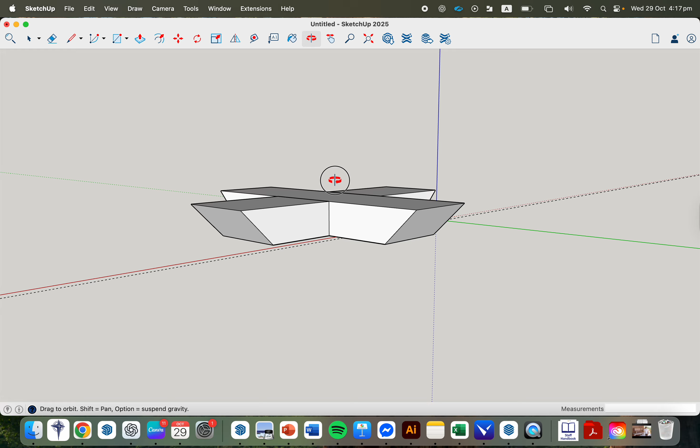We're going to be drawing the top part of the pedestal table, similar to the bottom part, but different, in that it's a cross-halving joint, but just slightly shallower, just so we can fit the tabletop on top. So basically, you can see this is what I've drawn already.

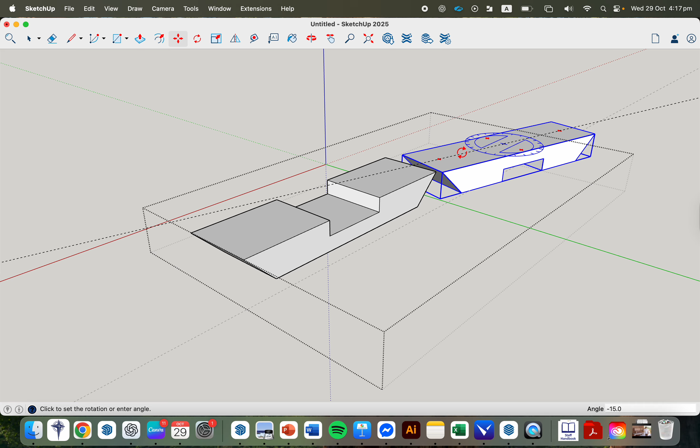We need to draw both pieces, which are very similar. When I rotate these around and put them next to each other to show you, they're similar in that we have 45 degrees on each edge. So basically the shape, if you take this part and this part out, we have the same shape. What we're going to do is draw this shape first, and then put in the details of this cutout so that this bit fits on top of that bit.

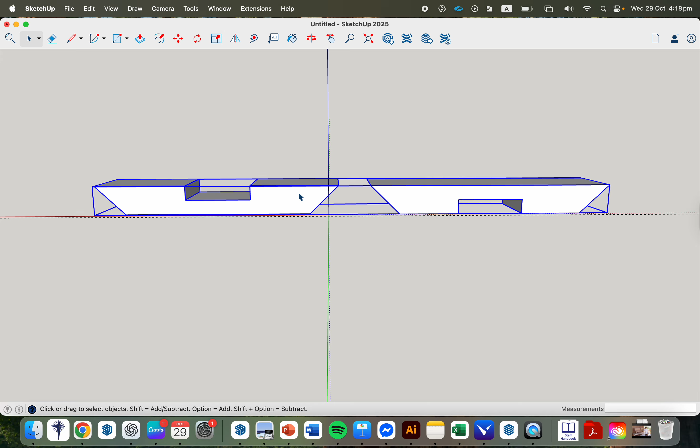Right, so all my hard work, I'm going to delete there. What we're going to do is open up a new window. So we're going to go File, New from Template. If you've already started your drawing, obviously you just continue with your drawing. You should always be selecting woodworking millimeters.

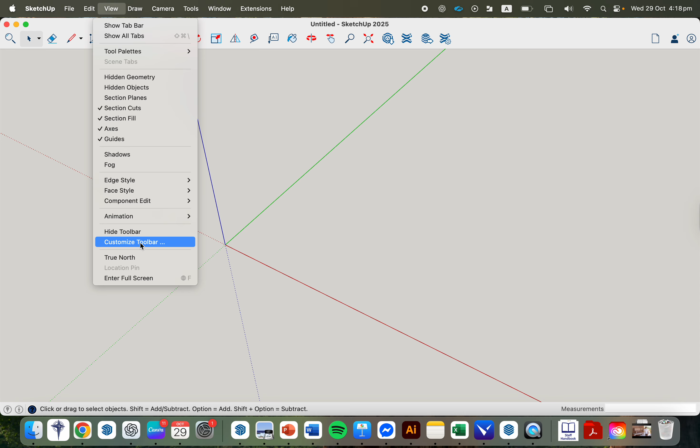Now there is something I want you to add to the toolbar at the top here. So if you go View, Tool Palettes, Customize Toolbar, click on that. And these are all these extra things you can put into the toolbar at the top here.

One of the things I find handy is this standard views. I'll show you in a sec, but you're just going to click and drag that into the top left hand corner here like that. Then you can press Done. So you can see, just while we're here, all these extra things you can be adding to your toolbar. If you find along the way that you need to add certain things, you can do that.

All right, press Done. Now the reason for that is because I want to draw the front shape. I want to be able to draw this top brace detail, this bottom one here. So I want to be able to draw that shape. When I flick across to SketchUp here, it's hard to orbit around, see, it's not great.

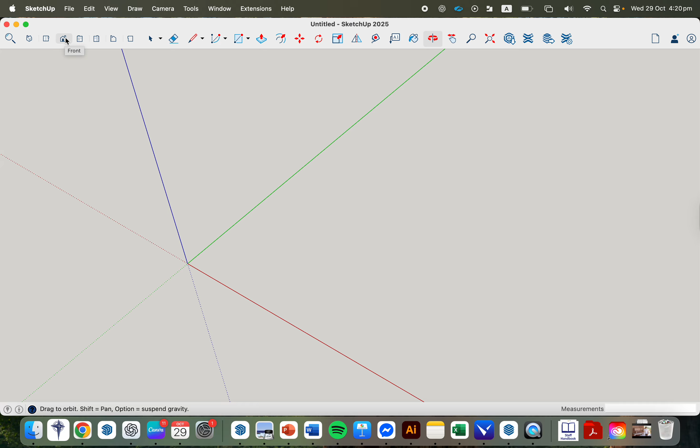So what we're going to actually do, when you use these panels up here, you can flick to a certain view. For example, ISO is isometric view, like a 3D view. If I want to flick to the top, I can do that, so that's a bird's eye view. What we want to actually do is go to the front. Now it doesn't change much there because I haven't drawn anything, so it's hard to tell.

But believe me, I want to be drawing from the front. So this is like the vertical plane from the front view, and that means I'm going to be drawing this shape from the front view.

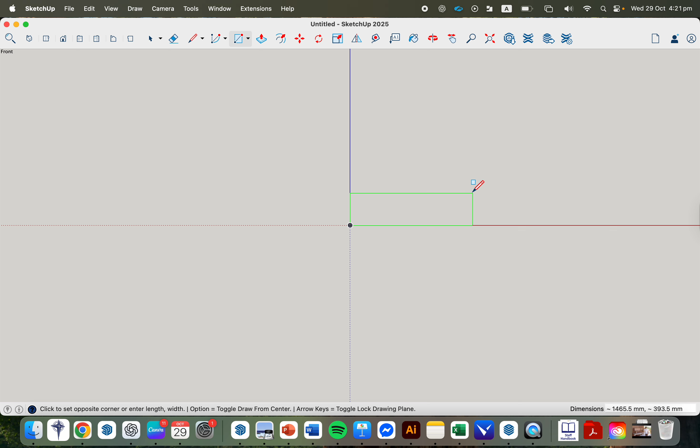Okay, so flicking across from this information, I'm going to draw something that's 150 millimeters long and 18 mil high. So I'm going to draw a rectangle, pick up the rectangle tool, come to the origin, click once, draw a random rectangle similar to the size I want, and then just type in 150, 18. Enter. And you can see that's a pretty small rectangle.

The trick here is you can press this zoom extents magnifying glass. If you do that, if you ever lose your project, sometimes you zoom out so far you go, where did I put my project? You can do the zoom extents and it brings whatever you've drawn into full screen. So it's cool. I'm just going to get my mouse pointer and zoom out a little bit there. So that's the rectangle we want to work with, the basis for this.

Now we're just going to draw these details in basically. So here we have a 45 degree angle coming down both sides from the top. So we're going to put that detail in first. So the tool that we don't have is the protractor, the protractor being what we use to measure angles in maths, hopefully you're aware of that.

There's two ways of doing it. You can do what I did before by going View, Customize Toolbar, and here you can see the protractor. So because we're going to be using that, you can drag the protractor up into your toolbar.

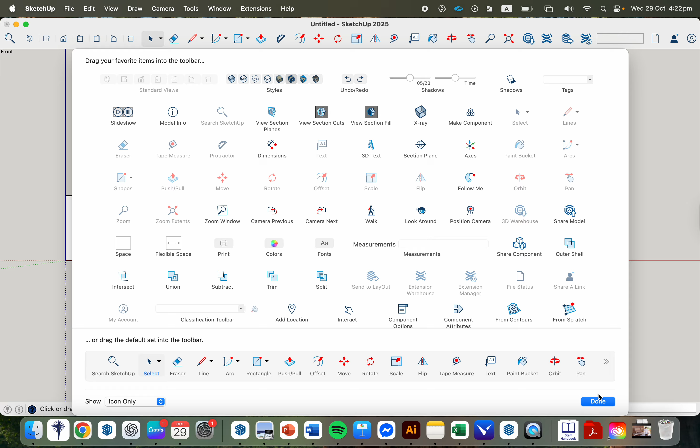Press Done, so it's now there, we've added that. Or if you want to just have all your extra tools available, you can pick on Large Tool Set, and that brings up a big suite of tools that are just a bit more than what you've got as the default set up the top. So either or, I'm going to work with just dragging the protractor up into my toolbar because that is less clunky for me, but whatever you guys prefer. Now, to get a 45-degree angle, we want to bring it down.

I'm going to do the left-hand side first. You're going to click on the very top - that's kind of like the pivot point. So you're going to click here, and then our second click will be at the bottom. That's telling SketchUp that's going to be my baseline.

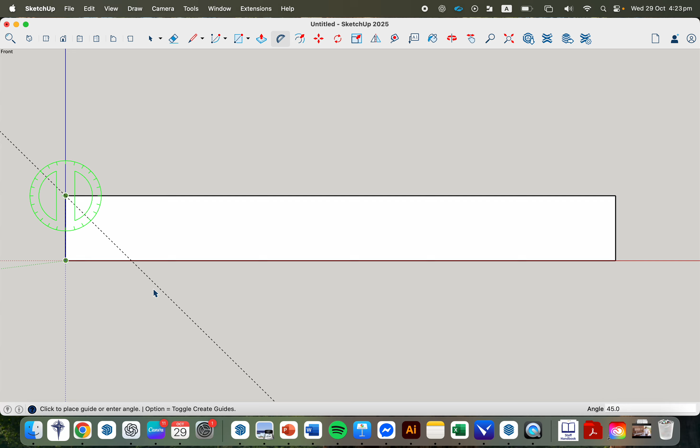Then I'm going to drag across until I get to 45. As I continue to drag, you can see down here it's snapped to that exact number, which is good. But if not, remember you can just click anywhere and type in 45.

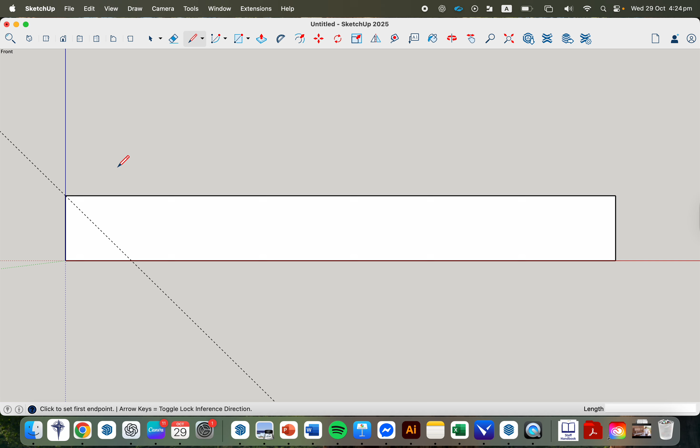Now that gives you a guideline, which is good at 45 degrees, but that's not an actual line, that's just like a guideline. So what you need to do now is pick up the pencil tool and actually draw that line in. We can then pick up the eraser tool, highlight over our guideline, and get rid of the guideline. So I'm going to repeat that process over on the right hand side.

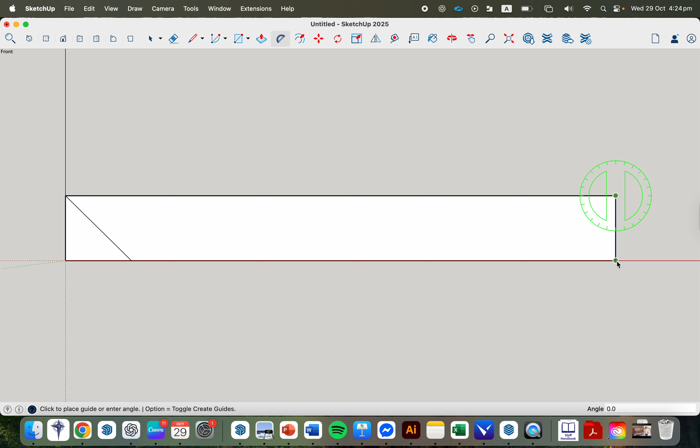So I'm going to pick up the protractor, start at the top, click once, and then the bottom, click again. I'm going to bring that up back to 45. Again, you can pick anywhere really and just type in 45.

Guidelines at 45. Pick up the pencil tool and draw - click at one end, click down to the other. It will snap to that grid. Draw the line in and then erase the guideline.

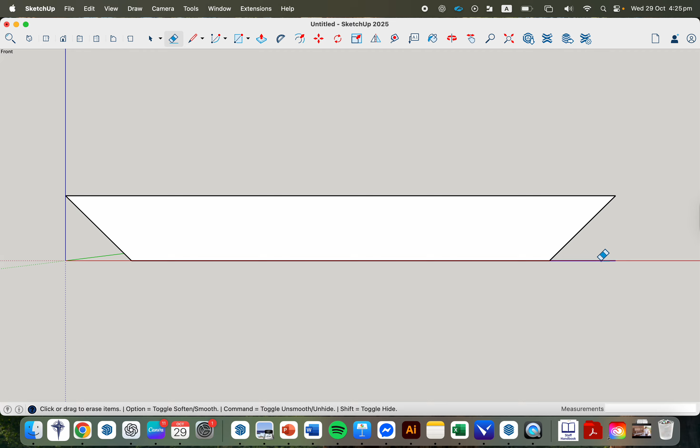Now, because we're working in 2D here, we can essentially erase our lines there that we don't need anymore. Okay, so we're left with our base shape that we need, which is excellent.

All right, now we have to figure out - have a look at this here. This is 40 millimeters in the middle. So we'll worry about this one here first. What we want to be doing is figuring out if this is 40 millimeters in the middle and we have a total of 150 from one end to the other, what are we left with in this gap? So if we go 150, take away 40, we end up with 110.

We have to divide 110 into this side and this side evenly, and that's going to give us 55 each side. So we're going to go from this edge into here - that will be 55 millimeters. So this is part of what we do, is we're going to have to read plans and figure out measurements. Not everything's always black and white here. You're going to have to figure some things out like that. So 55 mil from the end.

So what we're going to do - pick up the tape measure. I'm going to measure from the left-hand side, click once, drag the tape measure across and type 55. That gives us a guide point there. And we're also going to do that - click once on the right-hand side and drag it left 55.

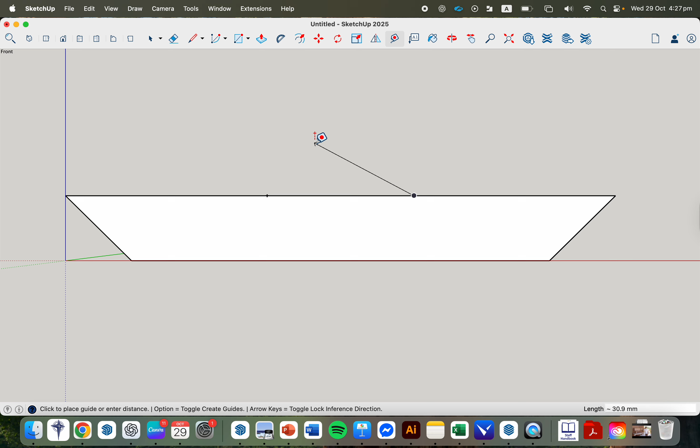Now, you can double check this if you want - we may as well. If we go from that guide point to the next one, you can see down at the bottom right-hand corner that that's 40 mil. That's excellent. So instead of clicking on the end, just press the escape key, ESC. The escape key is used if you just want to deselect, just not be on that selection. So we've done that.

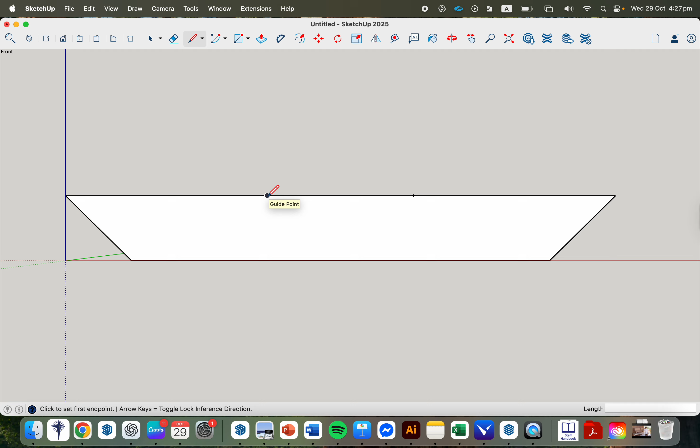So what we're going to do is draw a line down from those two guide points. Pick up your pencil tool. From the top guide point there, click once, draw a line straight down, and we're going to do the same thing from the top here. Click once, draw a line straight down. By default, I always go back to the mouse pointer - click that, and that just means I'm not going to be making any mistakes. Now, that's what we want.

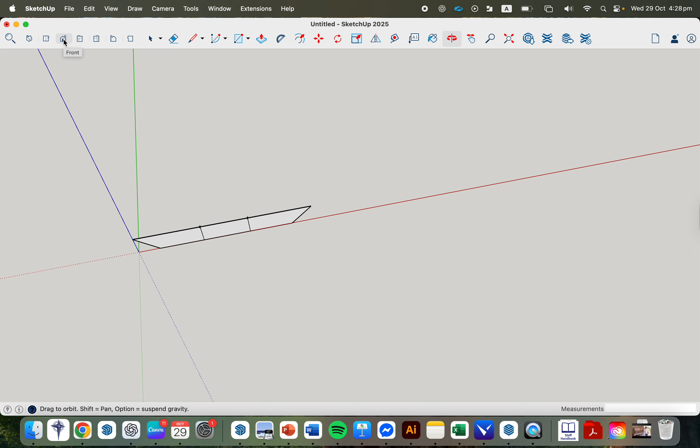Now, at the moment, I haven't used the orbit tool at all. I don't want to do that - I want to stay on this plane. So if you do, by accident, go like this, and you want to get back onto that front plane as if we're drawing in 2D, because that's essential, just click, go back up to the views and press front. Okay, so I want to be keeping that true, so right on that plane.

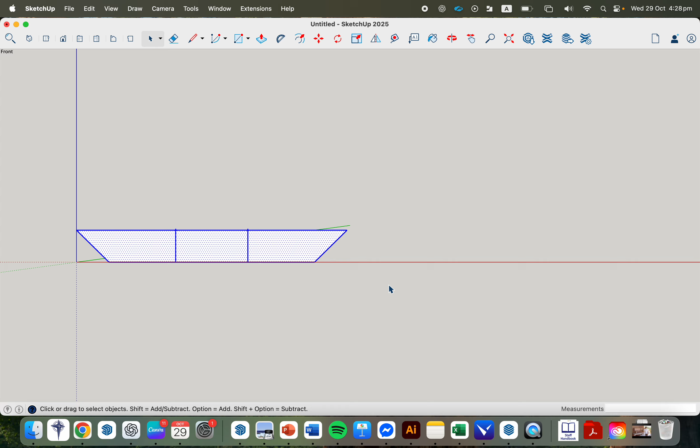Now, to save us having to draw all that information again, we're going to use the good old copy and paste. So you're going to get your mouse pointer, hold it down, select all of that, and we're going to press Command C and then Command V. And that's going to give us a whole other piece in the space of 2 seconds, which saves us a lot of time, which is good.

Okay, so the reason we haven't done any of this yet is because we can use those guidelines to cut out the top. I'll flick over here. One of them we've got to cut out the top, one of them we've got to cut out the bottom.

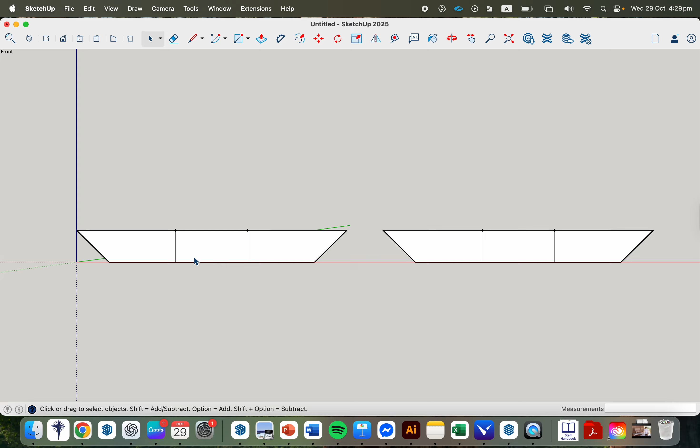So I actually probably could have done this midline, but that's okay, we'll do it here. Pick up the pencil tool, and on your left one to start with, you'll be able to pick up a midpoint. So you click on it, then click to the other side, inside here. As I said, you could have done this first and then copied and pasted that, but that's okay. We're going to do that to both. SketchUp, being intuitive, will pick up the midpoint, so you just click on the midpoint, then to the other side and click again.

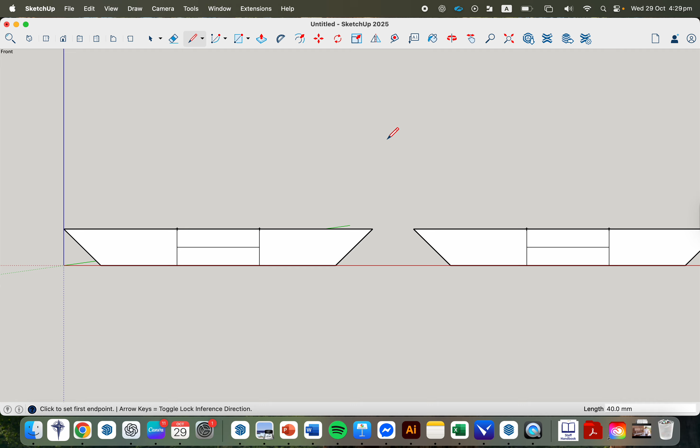For one side, you'll erase the top line. The other side, erase the bottom. And we have 2D versions of what we need, one being this, one being that. Also erase these extra lines that we don't need. Here. Here.

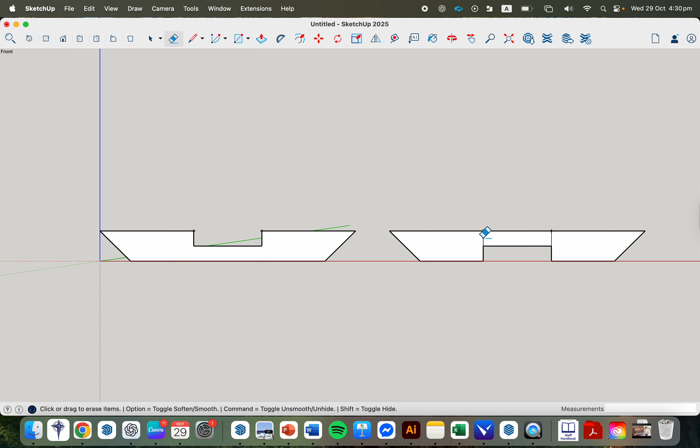Now we've also got those guidelines, guide points. If you simply get the mouse pointer, highlight over each of those guide points, we don't need them anymore, they can go away. You just highlight over the corners and press delete. So essentially that's a good way to do SketchUp in just creating your face at the end, or the edge of that piece.

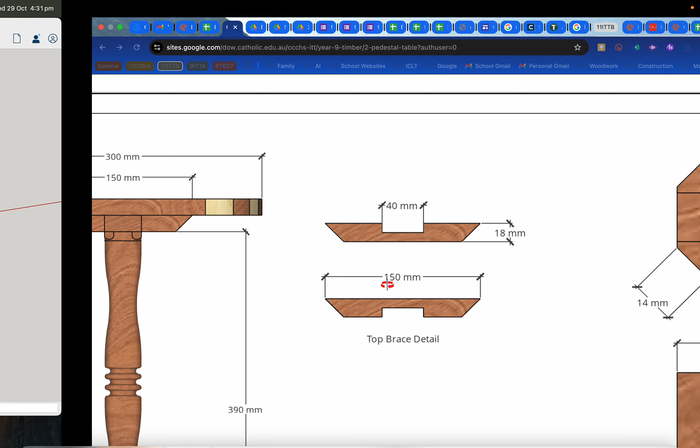And then we can simply push-pull both of these to the width we need. Now, how wide are the pieces? How do we get that information? Well, seeing this is a cross-halving joint, we have 40 millimeters in here, which means these pieces need to be 40 millimeters wide, so they slot in. So we've got that information.

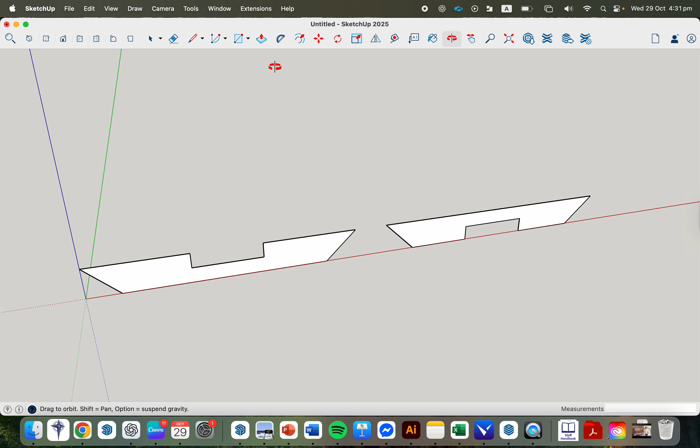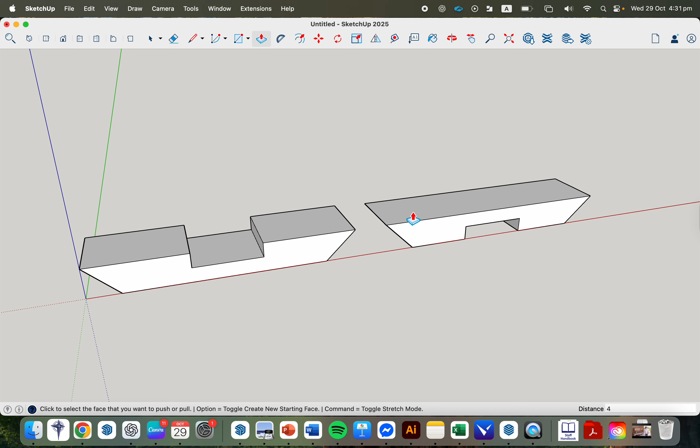So what we're going to do is push-pull both these pieces, pick up the push-pull tool, select that end, press once, push that back to anywhere and type 40, enter. We're also going to do that on the right hand side. Push pull, click anywhere, type in 40, enter. Now we've got the shapes we need.

But we can't move these around because we haven't made them components yet. So if I attempt to move these around, pick up the move tool, it's going to make a mess. That's not going to do what we want. So I'm going to undo that.

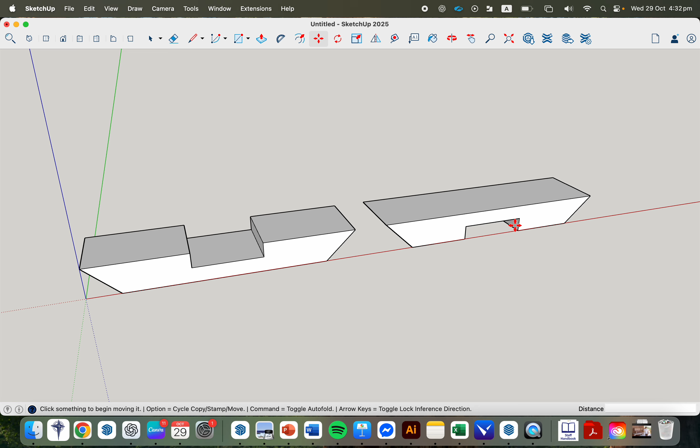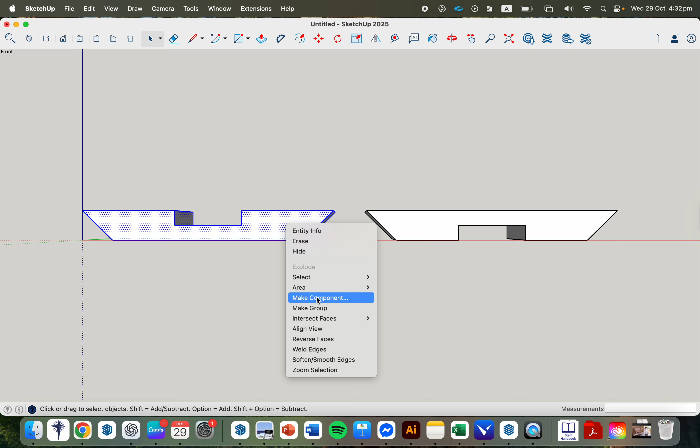Now for each of these individually, I'm going to flick it around back to the front view. That's what we can see there. Then I'm going to select the one on the left, highlight that one, right click or 2-finger click on your trackpad, make it a component. You can call it something if you like, I tend not to worry. I'm just going to go create, press enter. Makes it a component that now we can move around as a finished product.

So again, get your mouse pointer, click in open air to make sure that's deselected, and repeat that process. 2-finger click on the trackpad, make component, create. Now we have 2 components. Now we've got to put them together.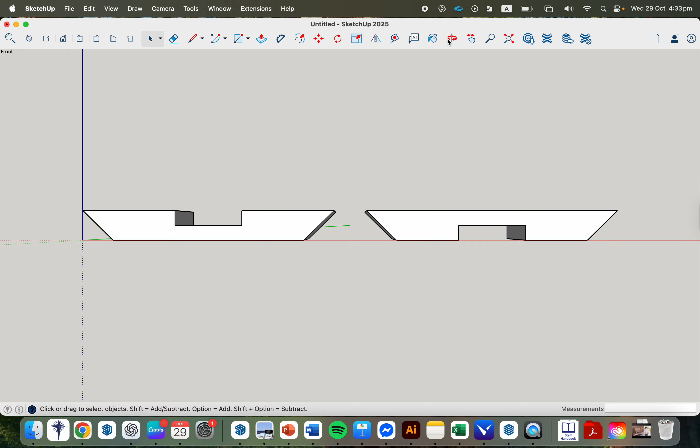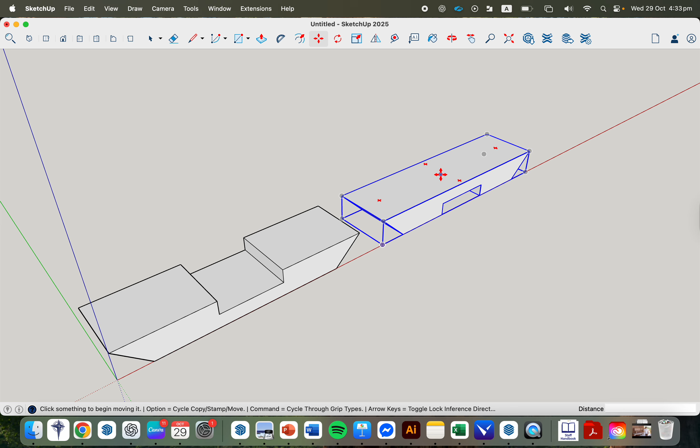Grab the orbit tool, orbit around so you can get a decent view of it like that. I'm going to get the move tool. When you pick up the move tool and highlight over a component, you'll see it pick up these 4 plus signs like north, south, east, west on that face. We want to rotate this around, so if I put that move tool over this plus sign, it turns into a rotate tool - SketchUp being a bit intuitive there. You can click on that end, and we're going to move that around 90 degrees. Click once, it says -90 on the bottom, and that's facing the right way.

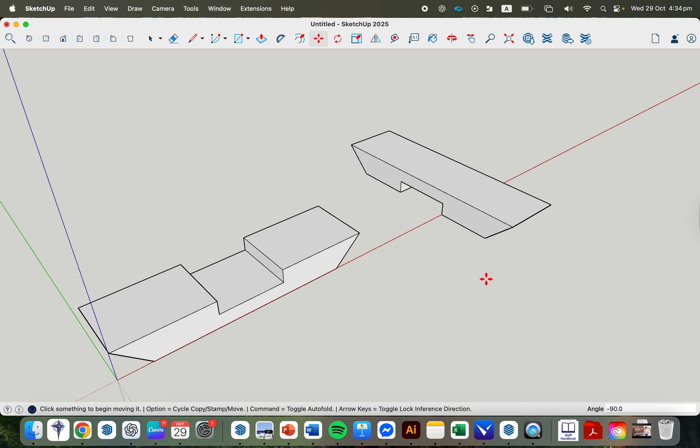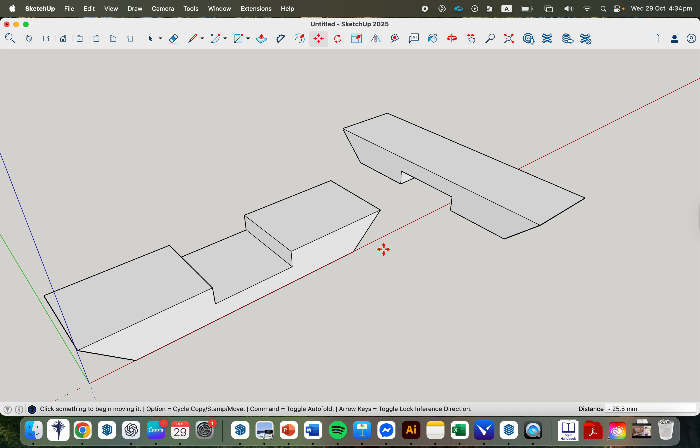Now when you move pieces together, if I want to move this over to here, it's really hard to do this and get it in the right spot if I just click randomly on this face. What I generally do is think, well, which point on this piece do I want to meet which point on this piece? I'm thinking this exact point, I want to marry up with this exact point. So that's what I'm going to select - that point at the top of that joint. I'm going to click once so I can drag it over and then try to marry it up with that point.

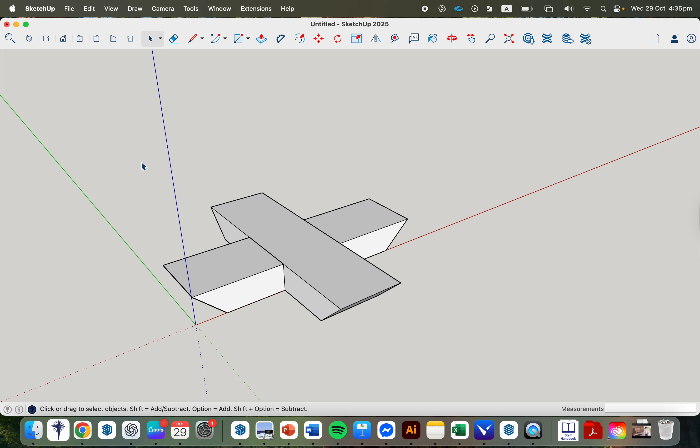And SketchUp will tell you endpoint in component 1. If you click, it's married together. We have our piece drawn, which is good. So the last thing we want to do - this isn't permanently together, but we don't make it a component because they're still two separate components. We're just going to highlight the whole lot, 2-finger click and make group.